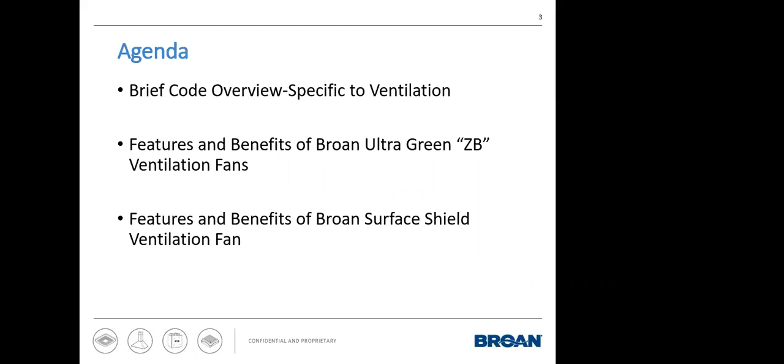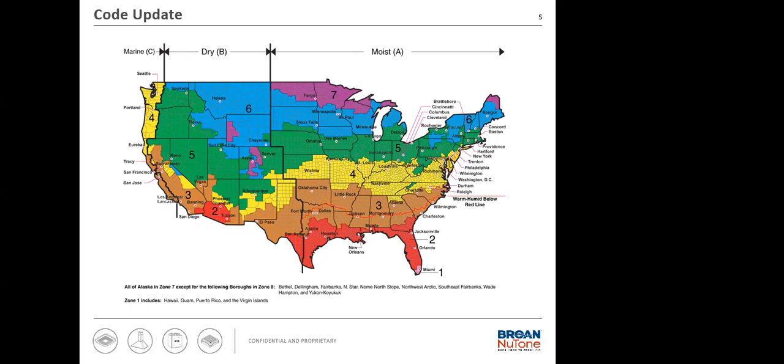As well as on top of that, every state and every municipality and every region has a different code adopted. And so it can be very challenging for you at times to understand what those are. And Broan is here to support you guys through those challenges. So by all means, reach out to Broan, reach out to your local rep and or myself. I'm more than willing to assist you guys with guiding you and directing you towards solutions that will work for your specific location.

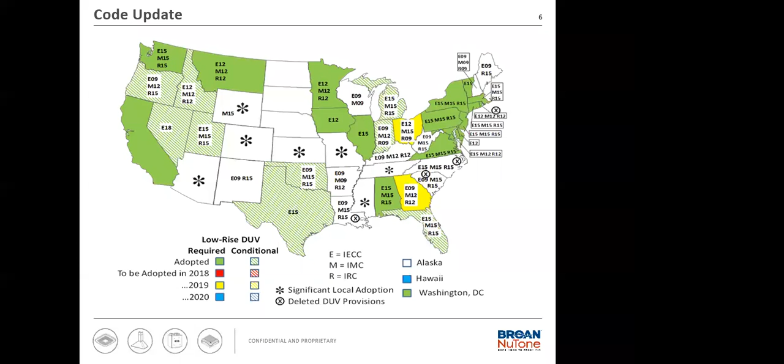Some of the key words or terms that are used: DUV, you'll see that quite a bit, which means dwelling unit ventilation. You're also going to see WHMV for whole house mechanical ventilation. So just be mindful of what those mean. And you're going to see them inside of the 2018 IRC and the 2018 IECC. These are the two most recent adopted codes throughout the country. Both of these codes have requirements for whole house mechanical ventilation, wanting to bring in fresh air into the house. These homes are being built a lot tighter, and during that process, we are trapping contaminants, moisture, and so forth inside of homes. So we'll need to make sure that we are bringing in fresh air to keep that house habitable as well as comfortable and provide the best air quality possible.

You'll also see that there are requirements for spot ventilation, that you must deliver a minimum of 50 CFM at 0.25 inch of static pressure. Also part of the 2018 IRC, range hoods must be third-party verified and certified through, like, HVI. And if you have a range hood that's over 400 CFM, you're required to provide makeup air for that range hood. And also, if that range hood is over 100 CFM, it must be vented to the outside. So these are some of the challenges that you guys will see with these different codes as you experience them updating in your local state.

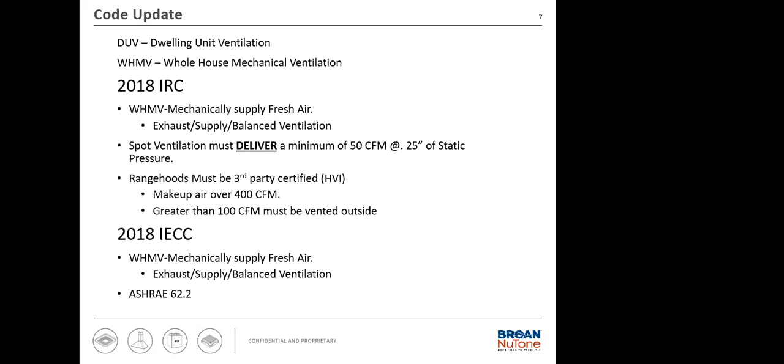What I also want to review is that HVI has standards out there when it comes to how to size fans for bathrooms. How they've done it is you have your length times width times height times 0.13. So it's really a simple calculation for you to use when it comes to calculating the actual CFM. Even though the codes state that it's a minimum of 50, it doesn't mean that's the maximum or where you should be at. So if you have a larger master bathroom, you may need 100 CFMs in that bathroom.

Something to also keep in mind is that Broan, for decades and historically, has documented all of our fans at 0.1 inch of static pressure, which is about 3 feet of duct. It's what we use at the factory to test our fans. But through decades of installation and code reviews and so forth, we've come to find out that most homes actually have 0.25 inch of static pressure.

So even though our literature is going to say this is a 50 CFM fan, and you are selecting that fan in order to meet your requirement, it may actually not meet the requirement due to static pressure. Static pressure affects all ventilation fans through duct runs: how long is that duct run, how many elbows or 90s you have attached to that duct, and whether it's rigid or smooth duct. Those types of ductwork and installations can affect the actual performance of that fan.

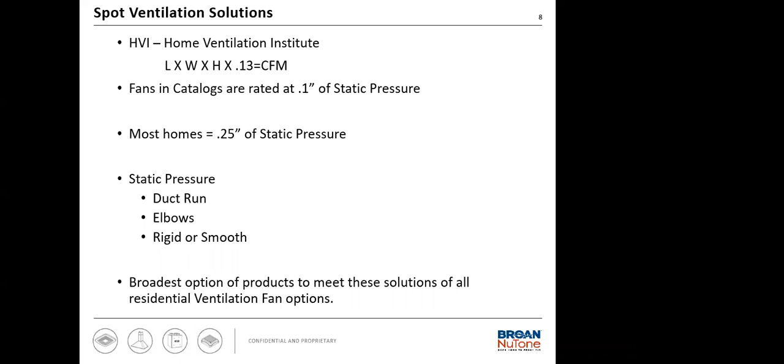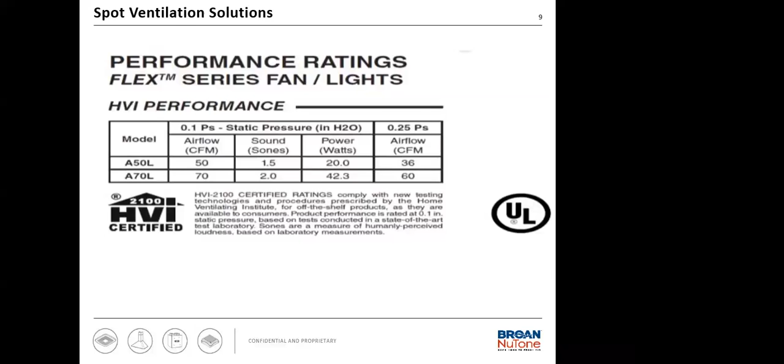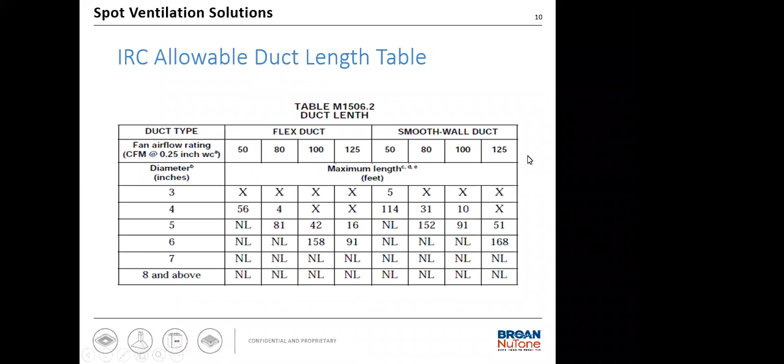So just be mindful that 4 inch is becoming the standard of pretty much most ventilation fans in the market right now. And that 4 inch isn't just the ductwork, it's the termination itself on the fan. We have a lot of legacy products that have a 3-inch termination, so we have started to launch new products with a 4-inch termination to accommodate 4-inch duct moving forward, and a lot of our new fans we're producing with 6-inch duct to help with performance. I can't emphasize enough that ductwork is so crucial to the performance. Proper ductwork and proper duct design is everything.

But we also understand the reality of it is that there's other ductwork or other piping or plumbing or trusses and all these things that are out there in the real world that contractors and builders are having to deal with. So you might need to put in some 90s or go up to the roof.

So just keep that in mind when you may be having conversations about ductwork, and I know you guys don't get into that business all the time, being electrical and so forth, but just be mindful that you have to partner up with that HVAC contractor and make sure that they're going that 2 to 4 feet straight, or making sure that that particular fan is mounted in a position that will allow for that HVAC contractor to hook up their ductwork and run that 2 to 4 feet straight before he makes a turn and so forth.

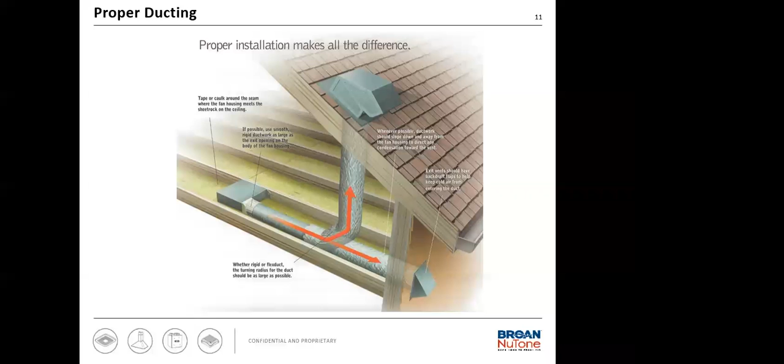So you're going to be seeing these type of tests being done, and it's typically done in the rough-in stage, after insulation's up and they've done some caulking and things like that, but before the drywall is typically when this is done, because then if there are any challenges and things that need to be addressed, it's easily addressable.

They can go out and re-caulk an area, or insulate an area, or some of your penetrations to the outside. If you're drilling any holes for your conduit or any of your transitions, we may need to caulk those and may need to address how that air is going to come into the building.

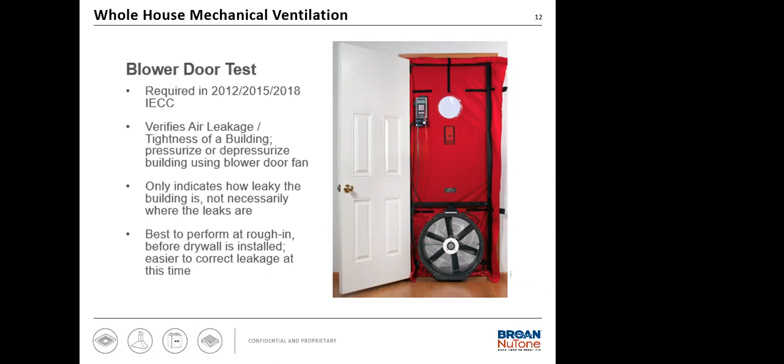And what your energy rater is also going to do is they're going to use what's called ASHRAE 62.2 charts to calculate the actual CFM number of that house. And every house is going to be different based off of the square feet and the number of bedrooms. So every single house is going to have their own calculations.

Well, one of our products, our ZB80, we're going to talk about later, maxes out at 80 CFMs. So you only have a 5 CFM buffer in that particular situation. So we always recommend that if you're that close to the maximum of that fan, always bump up to the next level just in case.

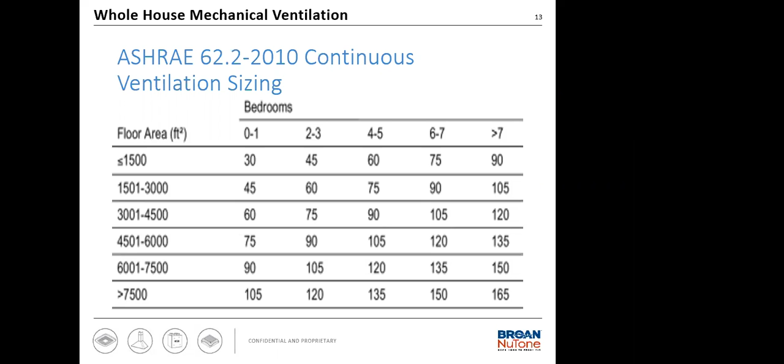Because what your HERS rater is actually going to do is they're going to use a table like this, where they're going to actually do all the specific calculations, and they're going to come out with a specific number, not just it's about 70 CFMs. They're going to say, oh, we want 72, or we want 74, or whatever it may be, because it's science, it's math to them, and that's what they're getting paid or on the job to do.

So you'll see here in this calculation, this top one, ASHRAE 62.2 2010 is the most widely used formula in the industry right now, where it uses 1% of the square feet of the home plus 7.5 CFMs per occupant. And how they're able to figure that out is number of bedrooms plus 1, because they're assuming that the master is going to have 2 occupants.

So in this particular example, we got a 3,500 square foot house. We have a 4-bedroom, and so we add that up with 35 CFMs for the 1% and 38 CFMs for the 4 bedrooms, and that gets us to 73 CFMs. So this is more of an exact of what your code official and your energy rater are going to use to determine what your CFM number is.

There are some municipalities and some certifications, such as Passive House or some LEED certified projects, where they're going to want to use the ASHRAE 62.2 2013 formula. And the difference between the 2013 and the 2010 is that they're using 3% of the square feet of the home versus 1%. And the reason why they're doing that is because we know that houses need more ventilation, but these high performance homes are built a lot tighter, to where they're really not getting much natural infiltration at all.

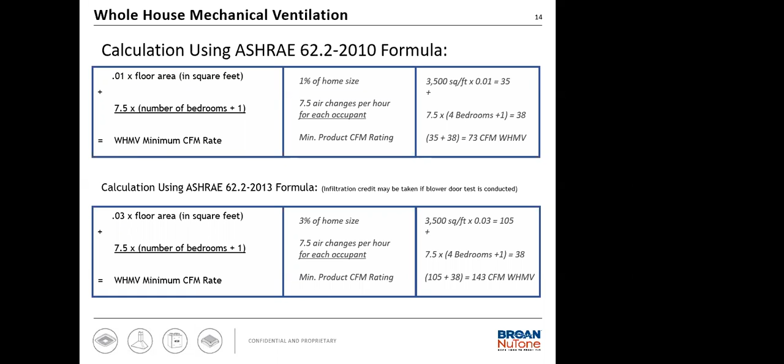Where the supply strategy is more exactly the opposite. We have a fan that's pushing air into the house, positively pressurizing, kind of like a balloon effect, and that warm air inside the home gets pushed into the wall assemblies and leaks out naturally. Or there's a balanced strategy where it has 2 fans. It has one bringing air in, one bringing air out, and typically they're going through an HRV or an ERV core, where we're able to recover some of the temperature, some of the money we've already invested in that home to heat or cool, but it is the most expensive, and it's not really used a whole lot.

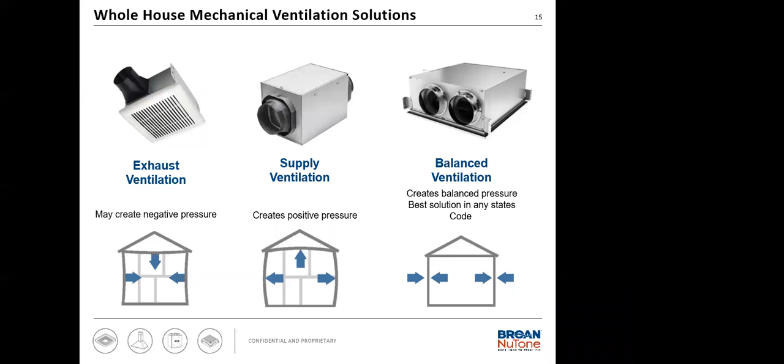So you would dial this in to 70 CFMs, knowing the fact that you have that wall switch hooked up to the boost feature. So as an occupant were to walk into the bathroom, they'd hit that wall switch and it ramps up to 110. All of these fans, the ZB series fans, have a timer also built into it, so that as you turn the switch into the off position, that timer engages and will continue to ventilate in boost mode for that period of time to really clear out the moisture in that bathroom.

Because most homeowners have no idea the damage or potential damage they could do to their house by not ventilating it properly and getting all the moisture out as quickly as possible. What you also see here is that we have DC smart motors built into this that will adjust for static pressure. So they're designed to be super quiet, running at that 80 or 110 CFMs.

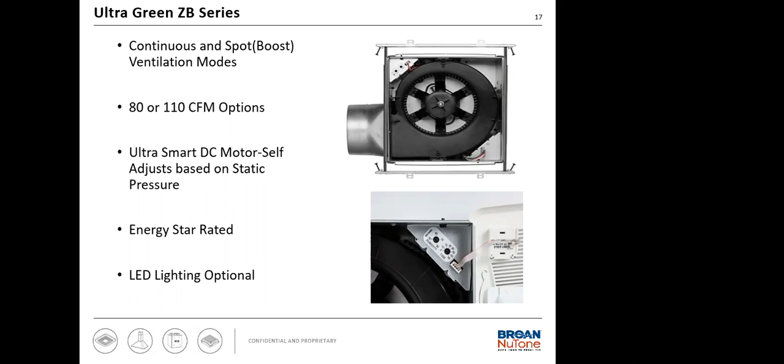How many times that toilet isn't exactly right on that stud, or that homeowner wants that fan right there. So you guys are sometimes required to put extra framing and so forth to center that fan. Well, we have that feature built into this product. I also want to make sure you guys know that this product is Energy Star certified, as well as has a lighted LED option available.

I'm going to show you guys a short video when it comes to our new Surface Shield product.

Introducing the newest ventilation fan from Broan. With Surface Shield technology, powered by Vital Vio. Bathrooms are a breeding ground for germs, mold, and fungi. The warm, humid environment is perfect for these germs to thrive. With a flip of a switch, Broan's powerful ventilation combined with Surface Shield technology helps protect your family by removing the humidity and preventing bacteria, mold, and fungi from growing.

Vital Vio light shines on the bacterial cell and activates an excess of reactive oxygen species within the cell. Buildup of these molecules is toxic, which causes cellular damage and the death of the cell, rendering it harmless. Surface Shield is designed to work continuously. Operating at less than 4 watts, it will only cost you pennies a day. The Surface Shield light, combined with a regular cleaning routine, will help keep your bathroom cleaner and healthier for your family.

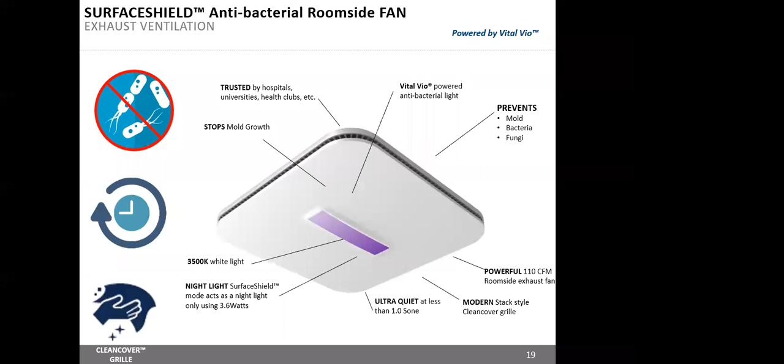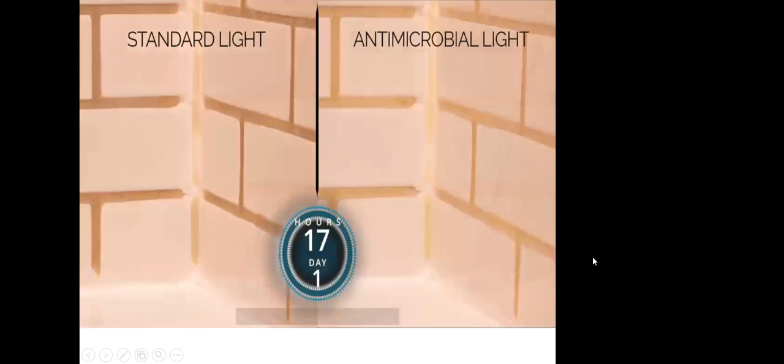I do also want to show you a time lapse of what it looks like between a standard light and the Vital Vio. This is just a 4-day time lapse showing you on the left here the standard light, and underneath this special lens showing you how it helps reduce that bacteria. Any of these videos that I've shown you today, I'd be more than happy to provide. All you would have to do is request it from us.

And lastly, this is a slide showing you the different options that it comes in. It comes as a complete unit with that 110 CFM fan, with the Vital Vio light and our clean cover grill, as you see there. We do also have it as an upgrade option with the grill and the LED light. So if you like that clean cover look and you don't currently have that on your unit, you can always buy it with that clean cover grill and the Vital Vio light.

Or if you already have the grill that you like, this option comes as a module only, where you can snap out the existing LED light module and upgrade it to this Vital Vio. But one thing I do want to preface is that this upgrade only works with our Broan A series lighted units that are currently installed.

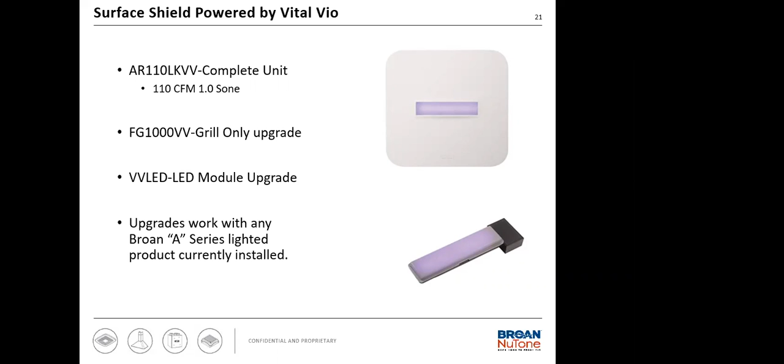So each of these strategies do have different benefits and features and so forth. And that's where, at Broan, we have professionals in all your markets. We are more than willing to speak with you about that and really help fine tune what solution is best for you. And keep in mind that Broan has been doing this for over 80 years, and we have so many different solutions out there that I call us a total solutions manufacturer. So it allows us to really fine tune a specific product for your project.